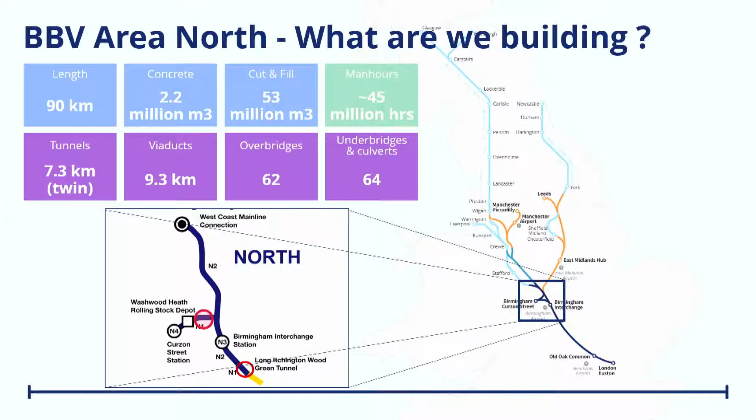Briefly, BBV was awarded the Area North of Phase 1 of HS2. It is 90 kilometres of the 230 kilometres of this first phase of the HS2 project. As main works civil contractor, BBV has to deliver 300 assets, among which 9.3 kilometres of viaduct, 62 overbridges, and of course 7.3 kilometres of tunnel. Our project is split into 3 delivery functions: major structures, main line, and tunnels, and into 8 sublots, each one the size of a major project. The sublot itself consists of a dozen assets in 2 construction areas, which are 30 miles apart.

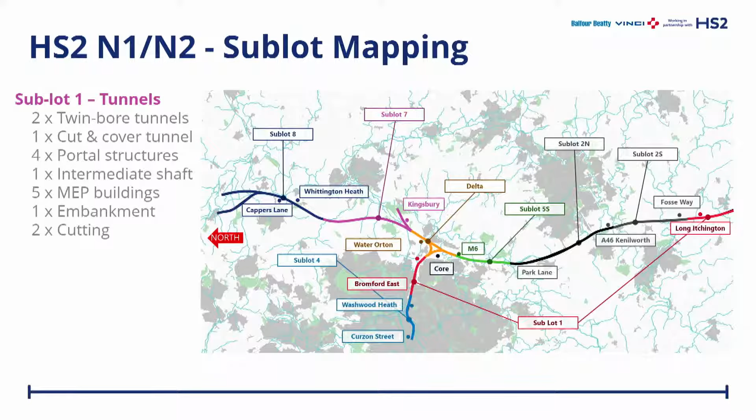So you can see here the project itself. The north is over there, Long Itchington at the south, and Bromford where we are entering the Birmingham area. Briefly, in our integrated project team Area North, we have employees from HS2, BBV and DJV. It is a co-location organization that is unified as a single team in order to deliver this railway for the future. This challenge starts and finishes with the people, of course, and we are looking at 9,000 people working at the peak, with a special focus given to local labour. As for Sublot 1, we are looking at 400 staff at the peak, with more than half already on board.

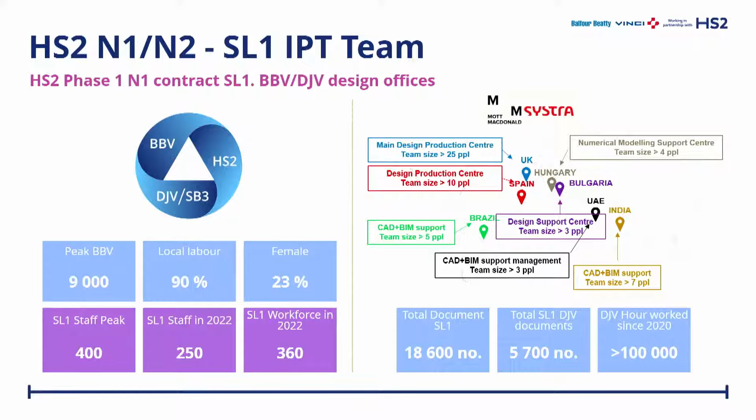Thank you, Jules. Which is which? It's the laser, okay. Right, thank you, ladies and gentlemen. As you heard, I've had some experience within the tunnel industry. It's nice to see some old faces out there, and nice to see some young faces as well.

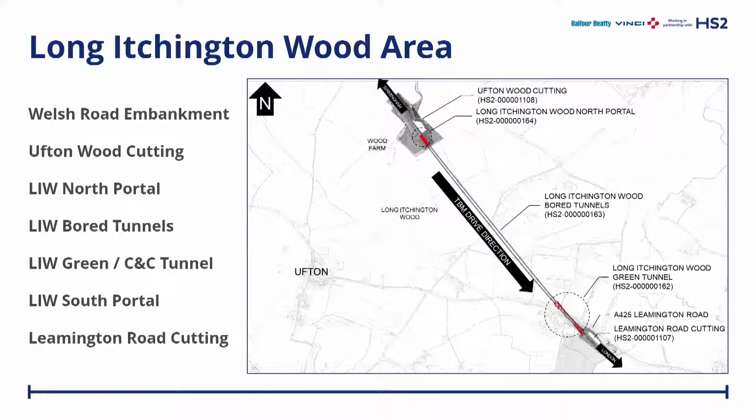This is an overview of the project, and this is the key reason why we are building this tunnel. This is Long Itchington Wood. This is an ancient woodland dating back to about 1600 AD. So obviously that's an SSSI, and the reason that we're doing these tunnels is to preserve this natural habitat.

So this is a view from the North Portal going down to the South Portal. The tunnel there, the up tunnel, no, it's the down tunnel because it's going down from London, is completed, and we're now doing Drive 2.

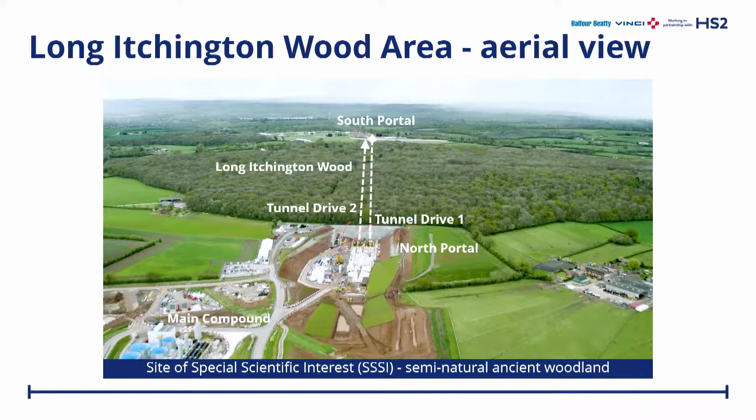Looking at the geology, mainly composed of Mercia mudstone. It's a very, very simple geology. There's been no shocks, no surprises, which is always nice. The only real surprise we've had is the Blue Anchor Formation, a little bit cloggier than we wanted.

The ground, very low permeability. So the 6 cutterhead interventions that we've done have all been in free air. We've been very lucky that way. We've had some clogging, as I say, and we'll go into that in more detail later.

Because we're going through a wood, obviously our instrumentation is fairly minimal, but as I'm going to get into later, we've put instrumentation in the woods, mainly surface levelling points, extensometers, inclinometers and piezometers, to check the progress and to check the viability of the machine we've been using.

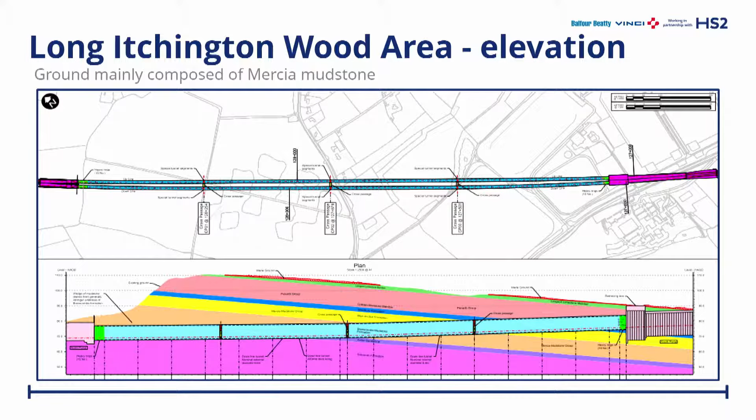So the main bore tunnel's got two 1.6 kilometre tunnels, Herrenknecht variable density machine called Dorothy. Called Dorothy after a local resident, Dorothy Hodgkin, the first UK female recipient of the Nobel Prize for Chemistry, and that was done after consultation with local stakeholders.

Tunnel diameter 8.8 metres. Segments are a steel fibre reinforced segment chosen for their durability. We have special segments for the cross passages with reinforcement and also some heavy rings at the front and end of the tunnel for supporting those areas of low cover. As I say, the TBM is a variable density machine from Herrenknecht.

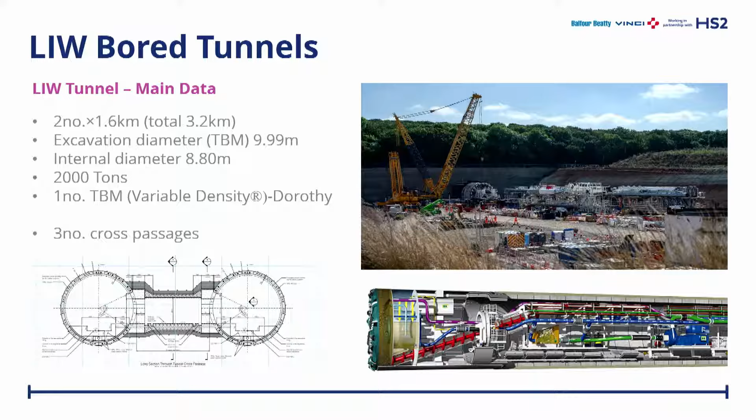And in that 1.6 kilometres of excavation, we have 3 cross passages which will be excavated by traditional means, hand excavation, sprayed shotcrete lining, and then concrete finishing.

So looking at our site installation, that's what we looked like in 2022. STP, a large STP to deal with the size of the TBM. Filter presses banging out 170 tonnes of filter cake per hour. Segment storage, 70 rings. And we've got 3 MSVs in the project along with 1 PSV for transport.

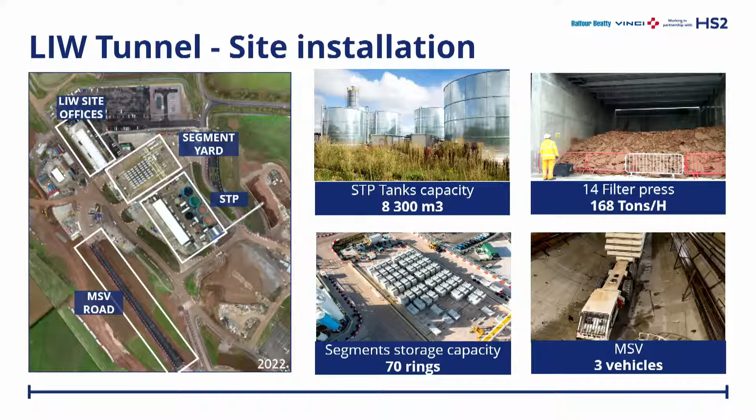STP's there, segment yard, segments are loaded onto the MSV and run down to the portal. We also have on here, which you can't see, a conveyor we installed across to a neighbouring sublot to help us with our muck away.

So TBM launch preparation, it's a fairly standard TBM launch preparation, standard reaction frame. What was interesting was when we built the machine, we built a steel ring within the tail skin, and that's our first permanent ring. So we build it in the tail skin when the tail skin is horizontal, and we flip them both up, and that gets us our first ring built.

Traditionally, on the smaller diameter machines, we build the concrete rings up along the side and then dog them in, but with this large diameter, that's not possible. So I hope this video will show that skin turning. Nope. There you are, you can just see the steel ring built inside the tail skin there.

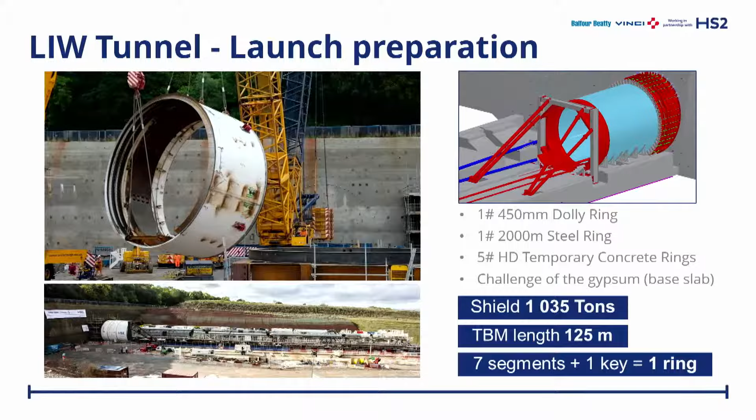So shield, 1,000 tons, backup, 1,000 tons. TBM length, 125 metres. So we built the base slab here. It's the permanent base slab for the railway. There were challenges with gypsum within the ground, so we had to deal with the swelling ground. That was all built into the base slab before the TBM launched.

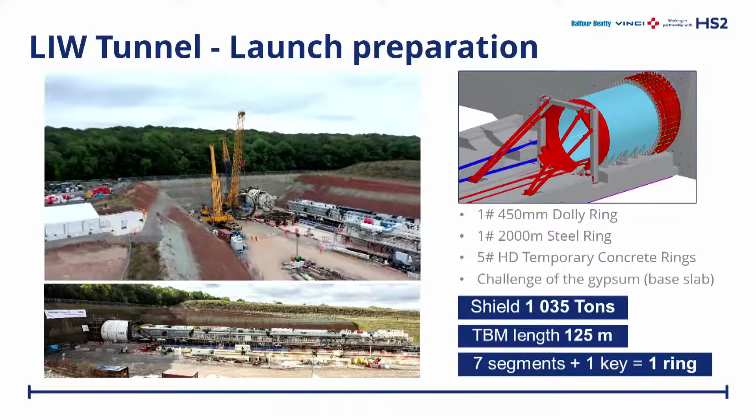So last year, we managed our breakthrough on the 22nd of July. That video's not going to work, is it?

There we go. So, key figures, 125,000 cubes excavated, 790 rings installed, and our best week was 65 rings, which works out 130 metres in the week. Did that drive in 240 days, with a bit of a slow start, but once we got past the learning curve, we had some nice performance towards the end. Best day, I think, was 13 rings in the day.

It's almost 2 million man hours worked. Got 220 labour, mainly from Tunnelcraft, and 40 staff working on the project full time.

This is Mark Thurston, who is the CEO of HS2, and next to him in the blue helmet is Mark Harper, who is the Minister of Transport. So he came through to do the first drive-through of the tunnel on HS2. So as you can imagine, that was quite a complex organisation to get him on site.

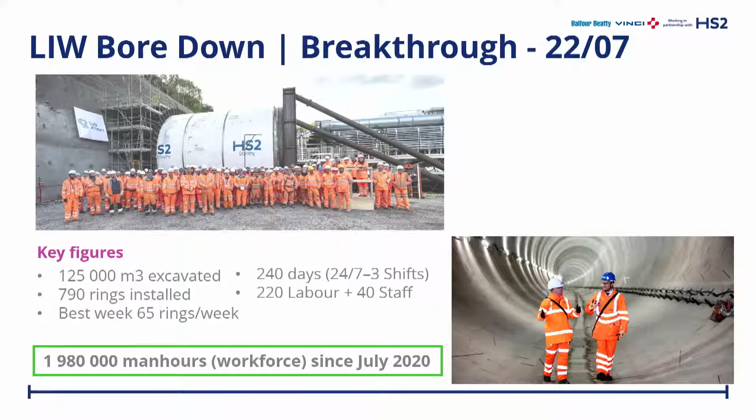So once we'd broken through, this is one of the big challenges there. In the early days, it was, do we turn the TBM round and come back the way we've come, or do we...

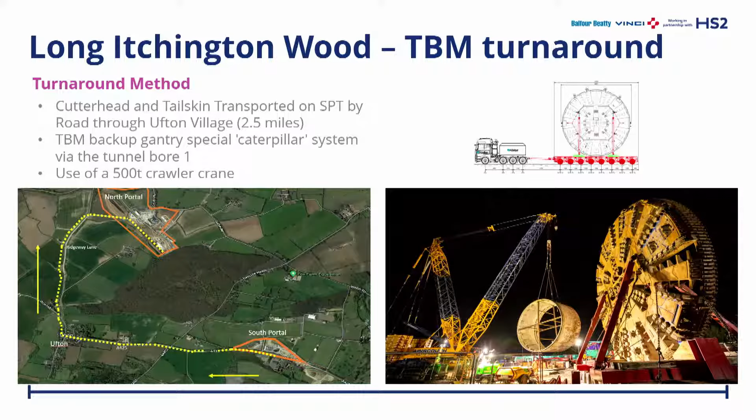Could we kill the sound? Thank you.

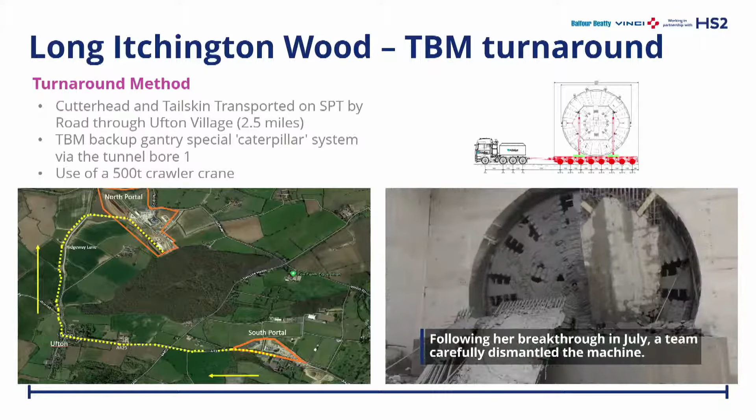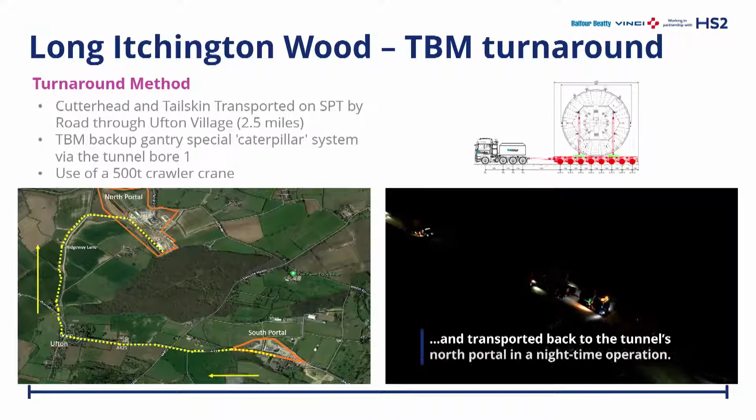Or do we disassemble the TBM and take it back to the start again? And the early decision was to take it down and dismantle it and bring it back. So the shield was dismantled in the south portal into its various constituent parts, cutterhead and the tail skin being the largest parts, main drive being the heaviest part.

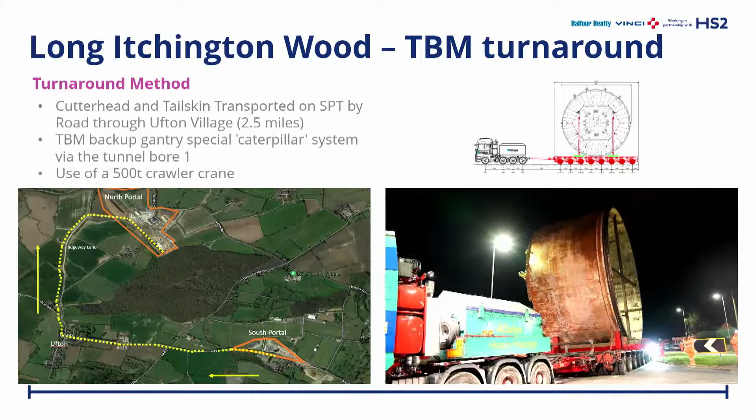And the gantries were pulled back through the tunnel using a special caterpillar system. We split the 4 gantries into 2 gantries, and we just jacked them forward like a caterpillar going out. That worked very successfully, took them out in just over 2 weeks, including the installation of all the steelwork.

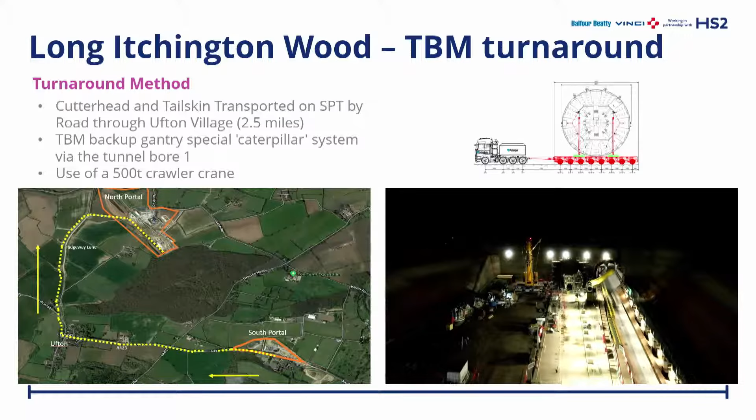Massive planning and coordination efforts with all the third parties involved. Ufton Village, we had to go through Ufton Village, which is here. We had Warwickshire County Council, HS2, local police, BT for all the services going over the road. We had tree preservation orders we had to get in place to remove trees that were in the way.

Warwickshire Power. In the end, along there, all the lines were cut out. We only had one telecom line there going to one resident, which was a problem in the end. Just before the cutterhead went past, we cut that, drove the cutterhead past and reinstated it. So as you can see, it's a rural site, so we've had issues with stakeholders and maintaining very low volumes of traffic as much as we can.

So the TBM came back, and we have to rebuild it. The TBM came back in 11 parts in total. We had a 500-ton crane there, and there you can just see the gantries coming out on the caterpillar system.

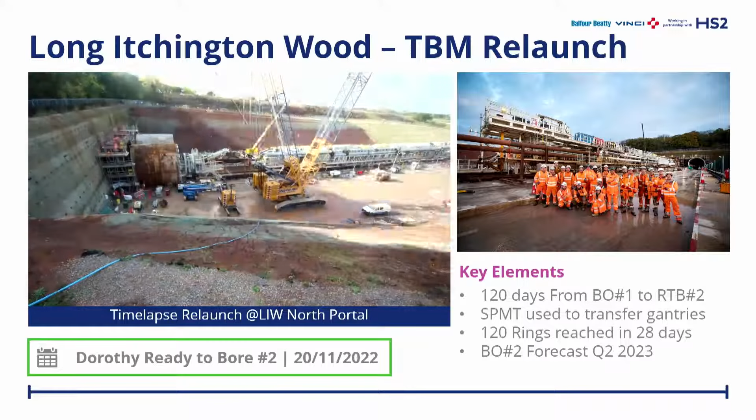So there's a lot of lessons learned from Launch 1, especially around the launch cradle design and the anti-roll device. We modified that, and we had a much more successful launch for this drive here. So once the gantries came back, they came back in drive 1. We had to translate them across to drive 2.

Original idea was to slide them across, and in the end, what we did was we used SPMTs. We pulled them all the way back up our MSV road, and then drove them back in again. And that was very successful. I was going to see if that comes up now.

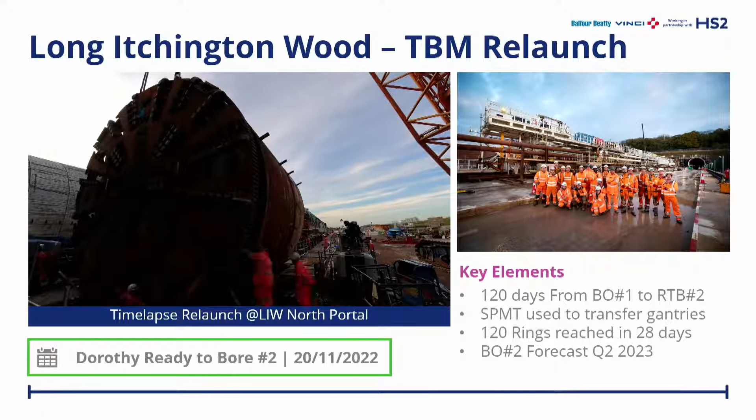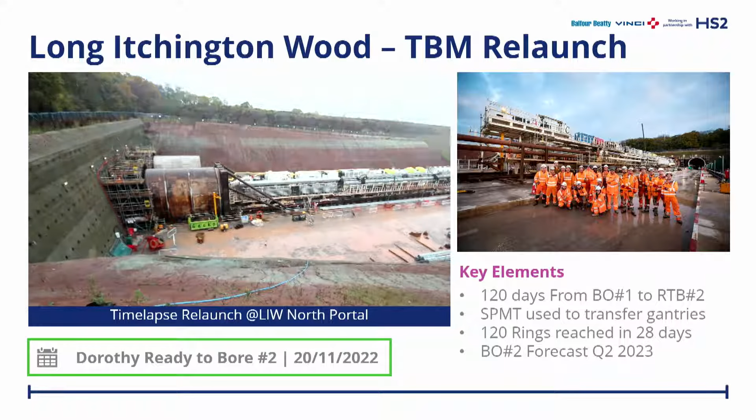So, modes of operation on the TBM. We launched in a full slurry mode because of low cover. And then once we got 100 metres into the drive, we switched to a semi-closed mode where we ran with an air bubble in the top of the chamber. This had a number of advantages. One, it reduced the total thrust pressure, and another is it massively reduced the amount of clogging we were getting from the ground.

There's 120 days from breakthrough to relaunch. We did it with 2 days to spare on our programme. This is a massive achievement for us, as a lot of people said it couldn't be done. We managed it with 2 days to spare.

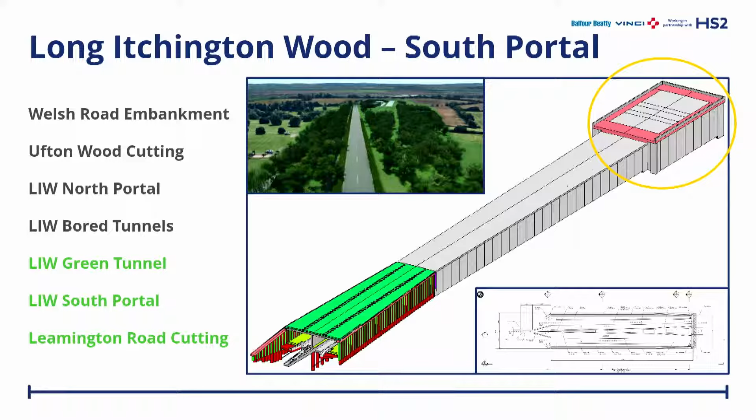So down the south portal we broke through. That's the south portal reception box there. We also have a green tunnel where the A425 will be diverted back over. And we have a porous portal here, which we'll go into in more detail.

So looking at the south portal there, the main difficulty we face is the site is split by the A425. And we also have an 11 kV running at 90 degrees across that as well. So the site has logistical problems. So the idea is we're going to move the A425. You can see the works have gone on here to allow that diversion to happen. Then we can extend the green tunnel into the porous portal here. And once the works are finished, we'll divert the A425 back.

Green tunnel and reception box, diaphragm walling, 25 metres deep. Due to the ground swelling conditions there, we use Cordek underneath the base slab. Top-down construction. One of the issues we had as well, and you'll see it better in the next slide, is that there is a polo field. We're next to the Dallas Burston Polo Club, and he had some very expensive lawyers.

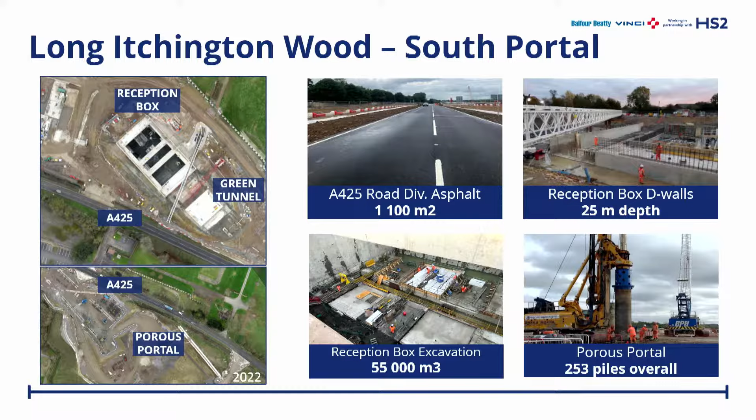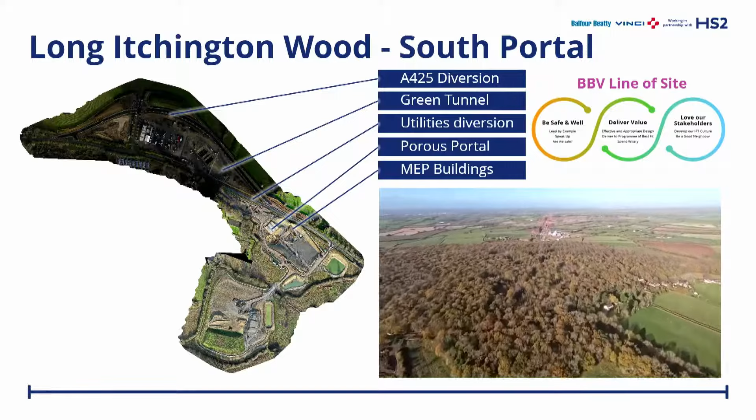So at both ends of the tunnel, we have 2 MEP buildings, which were the support buildings for the rail system contractor, and also in the future, there'll be where the operator of the network will have offices and base there. The porous portal, which we have at both ends, is a portal with openings in the roof. So as the trains are hammering in at whatever speed it is, the pressure wave is then dispersed and also reduces the noise.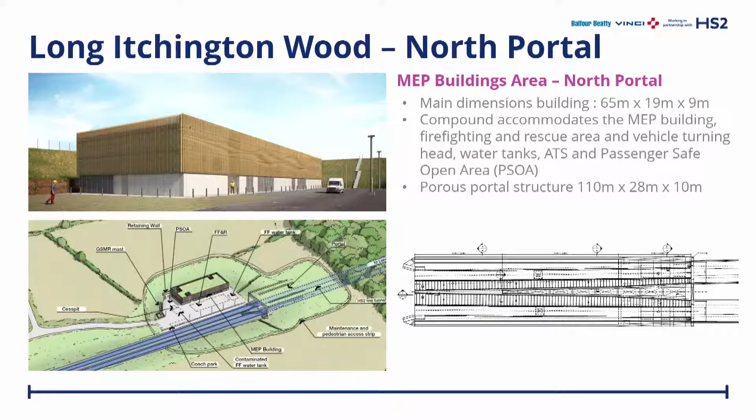And I just learned a fact before I came here that the trains, when they're running at top speed, they'll be in our tunnel for 29 seconds. So it's an awful lot of effort for 29 seconds. Okay, Jules, I'll hand you back to Bromford.

Thank you, Mark, for this amazing overview of the tunnelling journey in Warwickshire countryside. We will now focus on the second tunnel, twin tunnel of Sublot 1, which is located, as I was saying before, in the suburbs of Birmingham. So compared to Long Itchington, we're actually contemplating a tunnel 3.5 times longer, which requires the construction of an intermediate shaft that we can see here in the middle, and 13 cross passages. The diameter is actually smaller than the one of Long Itchington, with an excavation diameter of 8.6 meters, due to the line speed reduction when they enter the city or in the vicinity of the city.

The completion of the drive, which is a slight difference with the methodology that Mark just explained before, will require 2 TBMs actually, boring partially at the same time. So one is a new TBM that is arriving brand new, being assembled at the time. We'll see that later. And the other one is the now famous Dorothy that Mark is very much taking care of on Long Itchington. That is to be dismantled and reassembled at Bromford. So the particularity of Dorothy is that it was already configured to be reconfigured at the end to fit in a smaller tunnel. It's just fitted with a brand new shield, and then it can go all over again for its third drive. And we are doing the same with the STP. And you're going to see it poses some challenges in the next slide.

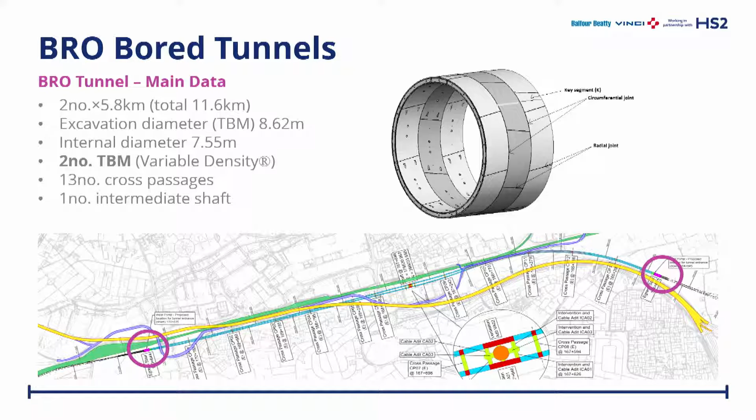So contrary to Long Itchington, the segments are slightly different. In Long Itchington, it's actually steel fiber reinforced segments. Here we're looking at reinforced segments, with only polypropylene fibers inside, but with the rebar cages due to high pressure and ground conditions, which are heavier than the ones at Long Itchington. So other design challenges we can mention are the jacking pressure and the passing of the M6, which we see over here. So the M6 is here, very close to our tunnel, and we're going to have a specific view on that challenge afterwards.

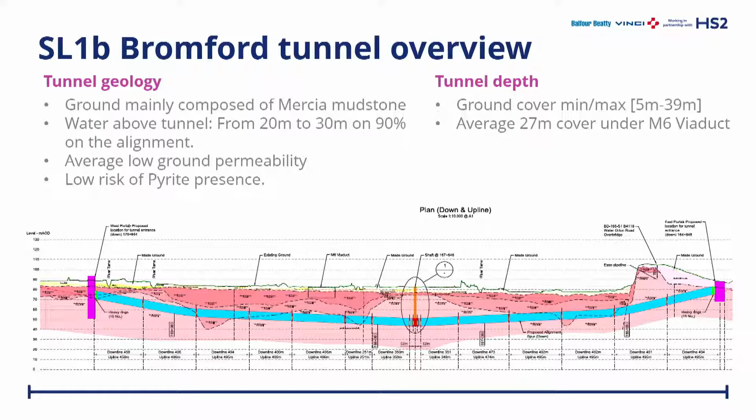So here we can see it's different from the countryside. We are inside the city. It's a very urban area. Hence the presence of multiple key interfaces along the trace, among which we have the EA with 4 crossings of the River Tame, which is close by. We have an Esso pipeline that is going around here and close to the site. We have National Highways, I was mentioning the M6 just before. And we also have National Grid with a main line powering Birmingham.

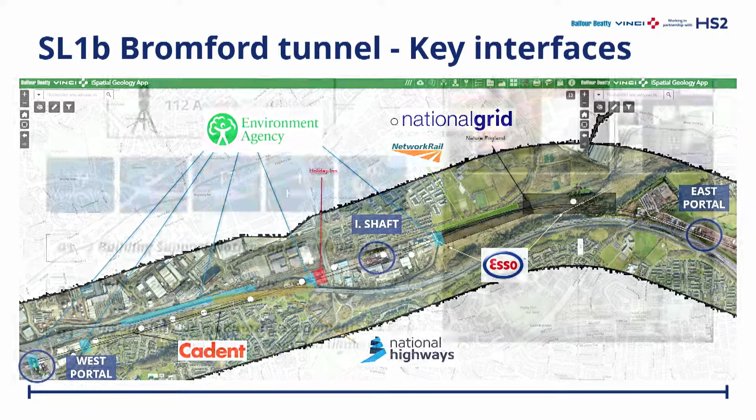We also have 112 assets in the zone of influence of the tunnel, composed of mainly 32 warehouses, 52 houses, and all the rest that is mentioned on the slide. So with HS2, we are very much in collaboration to follow the process of sending the building support notices, performing the defect survey, and installing all the monitoring equipment along the way.

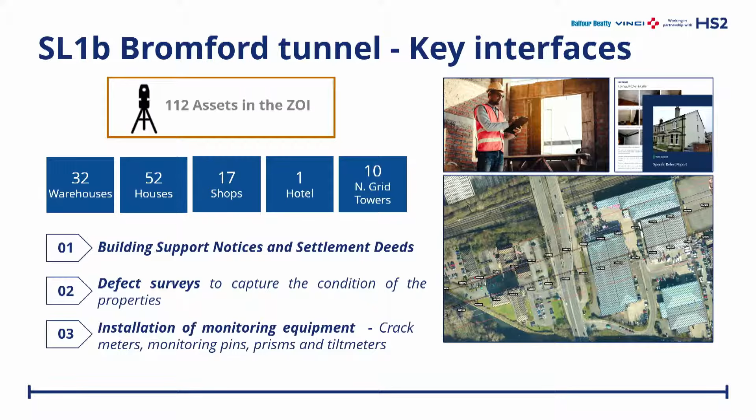As I was saying before, one of the key elements in Bromford, and one of the most challenging in terms of design, is the crossing under the M6. So as you can see, we are very close. We are in the vicinity of the M6, crossing here and going alongside for quite some time. Actually, the original design was very much parallel to the M6, so we had to reconfigure the tunnel so that we can minimize the interfaces between the two.

So the M6 viaduct, for those who don't know about this one, is one of the longest, or the longest in the UK. It's 3.5 miles long, and it's probably one of the busiest at peak hour. And it was constructed nearly 50 years ago. So, of course, the monitoring is key.

We started 4 years ago, as per National Highways requirements. We are to test 130 columns and evaluate them. Coring and testing of the pile caps is currently going on, and the potential reinforcement of those is under evaluation by the different parties. So we are currently basically evaluating what we have to do and if we have to do something.

So we will, of course, closely monitor the volume loss of the TBM as it goes close by the M6. The good results we have from Long Itchington, which are actually lower than what we anticipated in the design, give us good hope for the Bromford tunneling. We're actually at 0.13% of loss, whereas the design was taking into account 0.5% of volume loss. So we hope to have good news along the way, which would help in this case.

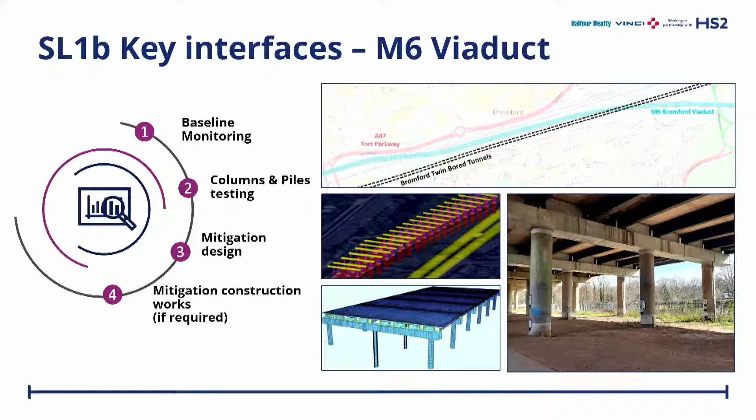Coming back to the east portal, as you can see on the screen, this is the configuration of the final structure. The building you can see on the side is the MEP building. Because of a lot of different constraints than the ones at Long Itchington, we cannot put it far to the side. So we put it on the side, but not necessarily far away. So we had to create this structure in the middle for the circulation, but it does actually take the same role. These are the aerodynamic structures, pretty much the same as the one at Long Itchington, dissipating the noise and the air pressure of the train when it's entering or exiting the tunnel.

We can also note the presence of a sump pit, so here I've put some cross sections of what we have, what it looks like internally. So this is the sump pit, so we have a pumping station, pumping out all the water and ingress.

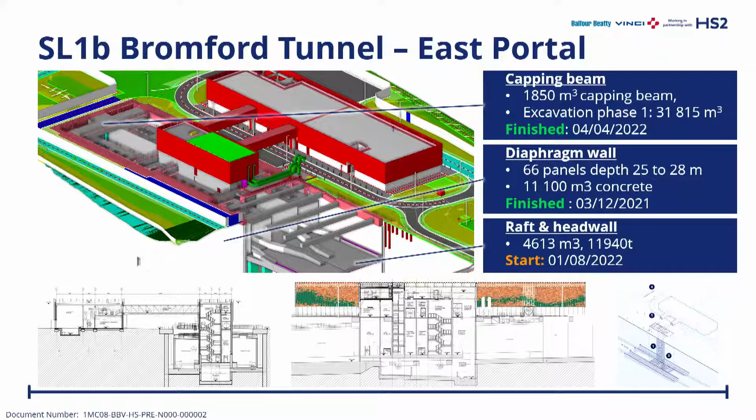Here is a view of the final configuration of the east portal. So after the portal, the tunnel is going this way, up to the west, and we have a long cut, the Water Orton cutting, which is a long way. We also have a landscaping development around, and here we see the final render of the building. We have tried, architecturally speaking, to blend this as much as possible and minimize the visual impact. So what you see is actually a tile cladding solution which has been retained, and we will potentially have a green roof.

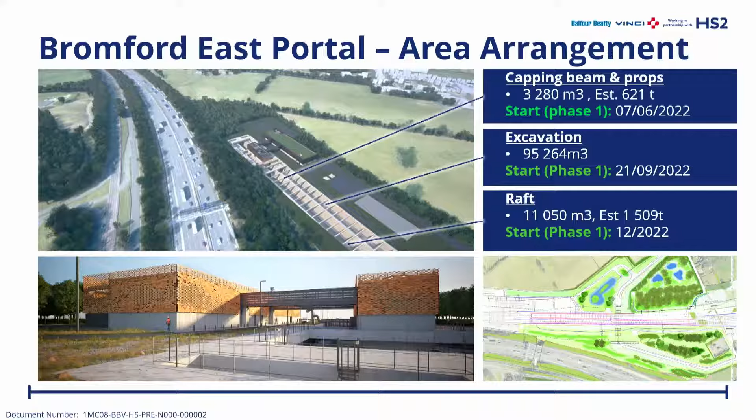Now, how do we organize to deliver that? So this is the view of the site. We have quite some challenges over there. The setup is different than where we are in the countryside, especially since it needs to support the operation of 2 TBMs and not just 1.

The STP2, as I was mentioning, will need to be reconfigured to fit here. In Long Itchington, we were blessed to have enough space to put the STP the way we wanted, but now we have to reconfigure and reshuffle everything so that we can actually fit it, like the missing tooth in this whole area. We also have the Birmingham Road cutting the site in 2. So here are the offices, here is the site, and the box is just here below.

So it's kind of a long site. We have many more houses close by, which is also, of course, presenting more noise interference with our works.

Another particularity that we can mention too is the presence of the WPD substation that still needs to be built, probably early 2024. Not in time for us to launch the TBM, so we are constructing a generator farm just next to it.

To minimize the impact of a generator farm, we're also trying to reconfigure the energy grid that is around and available in the area, being especially mindful about the harmonic compatibility of the different sources of power. So we are looking at combining a 4 MVA with a 3 MVA so that we can power up the TBM correctly and minimize the need for the generator farm. As information, the 2 TBMs will require roughly 12 to 15 MVA to operate.

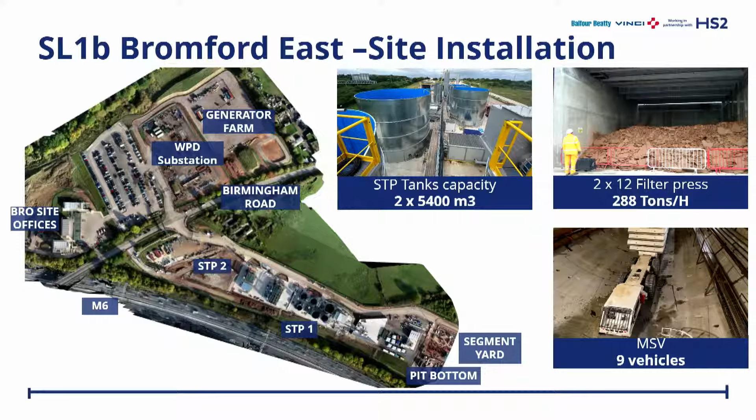So considering the configuration of the site that was just presented, the reception box is over here, so we're looking more toward the east. All the muck is difficult to move in an urban area, so as in Long Itchington, we are reusing it inside the site and avoiding having HGVs running on the local roads. In Long Itchington, we are avoiding roughly 30,000 lorry journeys by the use of a conveyor.

And in Bromford, we're going with a slightly different methodology, otherwise the conveyor would be very long to reach the destination point, so we are going with the use of ADTs. We're going to have 19 ADTs running at the peak, and this will probably avoid roughly 250,000 movements on the public highway, which I think the neighbours will be thankful for. We have to move roughly 1.8 million tons of material to areas close by, within the boundary of the site.

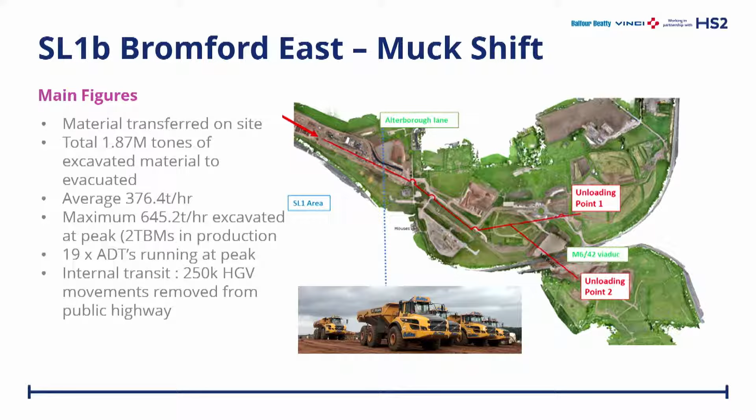The next step, of course, will be the assembly. Whereas in Long Itchington we could launch the TBMs directly in front of the tunnel with the 4 gantries one after the other, in Bromford it's not possible because there is a kind of a shaft. So we need to assemble the gantries close to the STPs, transport them with the SPMT, and then we have a whole sequence of shifting them and moving them inside the pit so that we can launch properly.

The other big challenge for 2023, apart from launching this TBM, will be the dismantlement at the Long Itchington Wood Tunnel: the dismantlement of the TBM, the transport, the reconfiguration, and the reassembly at Bromford. Everything must be wrapped up this year, so it's a pretty big challenge in front of us.

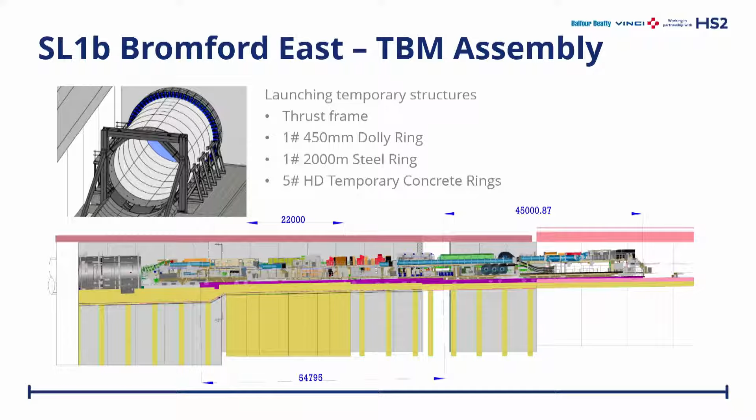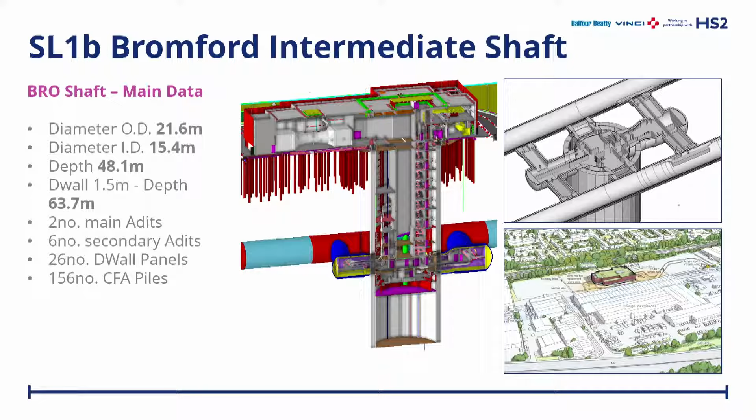The outer diameter is 21 meters. The interior one, taking into account the secondary lining, is 15 meters. We have 26 D-wall panels surrounding it, whereas the head house is supported by 156 CFA piles.

Again, same type of render as the one at the east portal. So this is the final look. So when I say we won't see a lot from the outside, this is what is inside in terms of utilities and services for the tunnel in the middle. On the top, the concrete structure, and then the architecture all around it, which is again minimizing the visual impact that we can have with this facility.

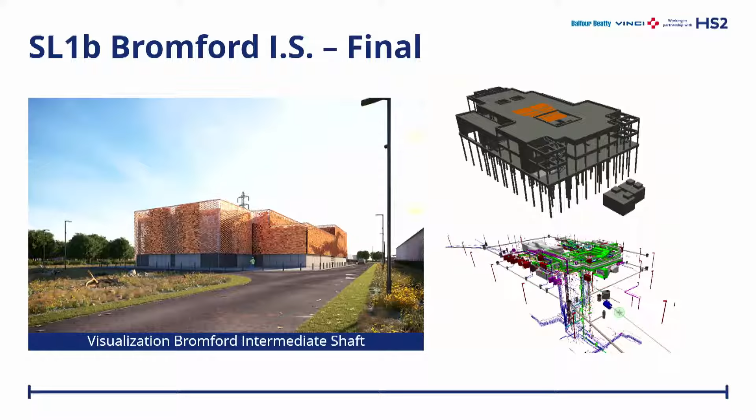So we can see the challenge in coordinating the mechanical and electrical in this kind of building and the ventilation, to fit everything which is going into this intermediate shaft. So how we organize. The site is also quite constrained. Same type of urban area, and this one is really a small area. When you go over there, you do realize that it's a very small site to operate.

The main interference and the main challenge we have in this site is the presence of the National Grid pylon. So we have this massive pylon, which is, as a fun fact, the same size as the D-wall. It's one of the main lines feeding Birmingham. So of course it has a zone of interference. We can't do the D-wall the way we want, the piles the way we want.

We need to be careful in every lifting operation. So this is kind of restraining the type of operation we can conduct. And of course, we need to take it into account at every step in terms of safety. So an assessment has been done of this pylon because if you remember, the shaft is between the two lines. So we're going to have a line pretty much here, and the other one which is close by.

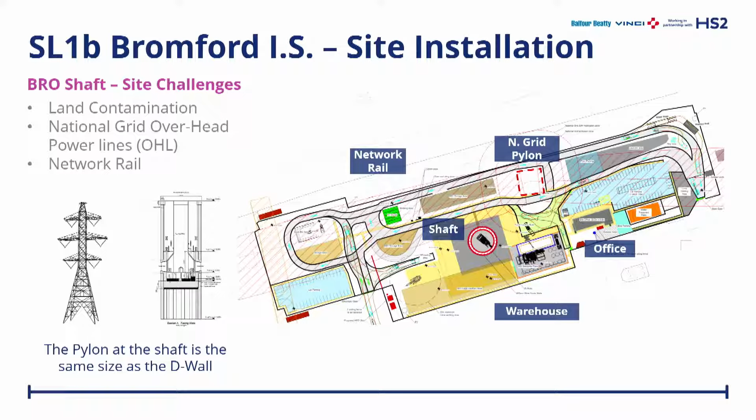When we reach the track plus one level, we have to do this system of tracks and then continue underneath with the secondary lining up to the base. The challenge in terms of timing is that the base slab must be done and cast, as well as the track plus one, before the first TBM passes. So it is one of the main constraints of our program. It's kind of a race against time to reach that level before the first TBM actually reaches the structure.

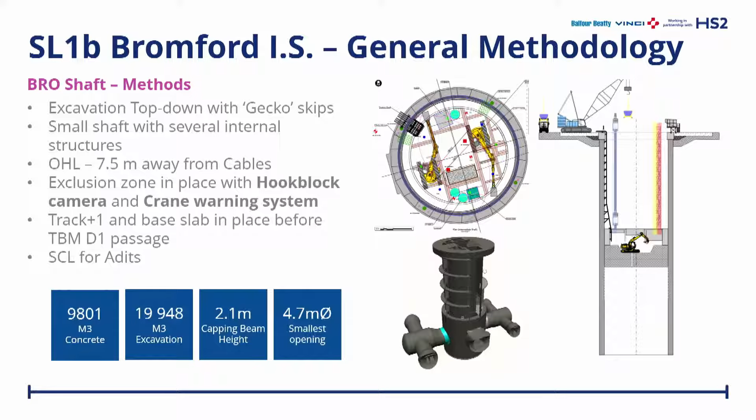The rest of the structure, once everything is done and the TBM passes, then we can start climbing up with the bottom-up structure, mainly the plenum, and then we can also go underneath to do the adits and caverns. The monitoring is quite extensive. As I was saying, we are closely monitoring the pylon, so we have installed a lot of different means of monitoring to ensure National Grid criteria are met.

News from the site: the excavation has started, actually. We completed all the D-wall by the back end of August 2022. And on the 9th of January this year, we really started the excavation process, and we are looking at starting the secondary lining soon. I didn't mention in the introduction that these are actually some warehouses. Here we see we have Network Rail. This was the shaft. And on top of it, it is a contaminated area because it's an old car auction area. So we need to take that into account in the first 4 meters of excavation, which we have passed now.

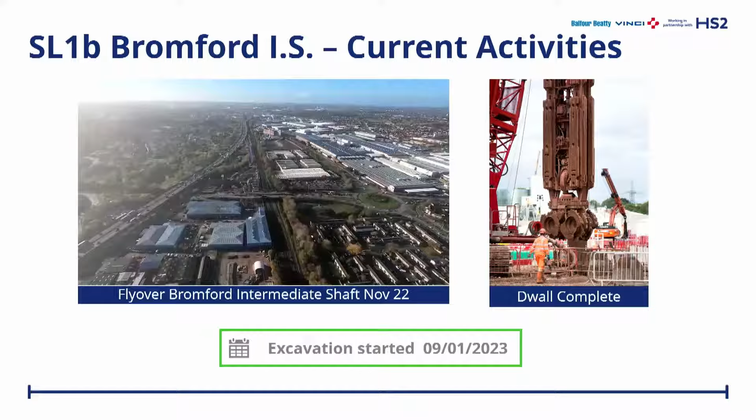Completing the overview of Bromford Tunnel, on the other side we find the west portal. Roughly the same configuration as the east portal. We can see the section on the screen with the vertical situation, the permanent props, capping beams, diaphragm walls, the base slab, the sump, which is quite bigger than the one on the east, some tension piles, and the aerodynamic structure for exiting the train and taking into account the noise, pressure and dissipation.

This is located at Washwood Heath, which is going to be one of the main maintenance depots in the area. And same type of building on the other side. So we don't have this famous operation of dismantling and transporting and the caterpillar system that Mark was talking about, because here the two TBMs are going to be dismantled fully at the west portal.

So we are looking at doing the other type of activity just after the tunnel has passed through. And we are currently executing the D-wall on the other side. So this is a pretty much accurate and existing picture of what the site looks like at the moment.

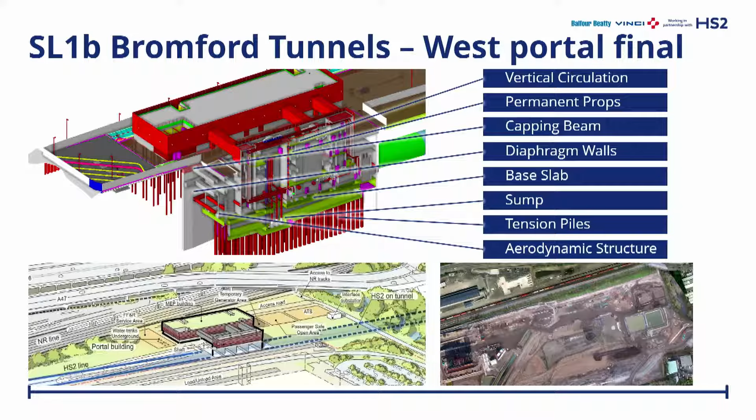So to feed all of that tunnel, we of course are relying on a precast factory. Our precast factory is located in Avonmouth, which is inside the Bristol port area. It is entirely a BBV production. We are looking at reinforced concrete segments of 2 meter width with an automated carousel system. As I was saying, the factory is directly managed by BBV.

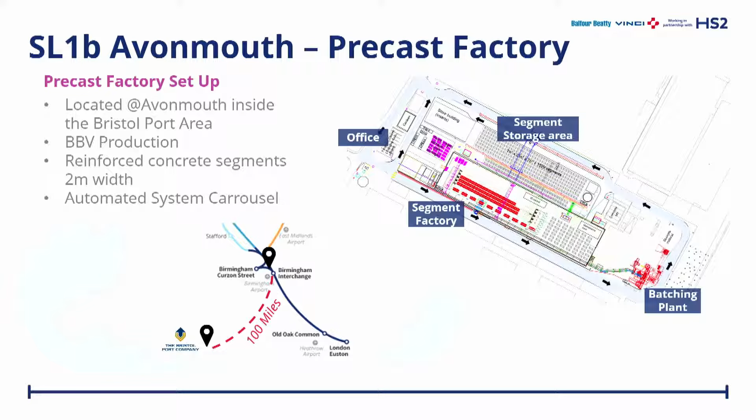It is actually the factory that was also doing the segments for HPC, Hinkley Point C, so it allowed us to take a lot of lessons learned and embed them in the way we wanted to do the processes, to optimize, and to also reach some of the sustainability goals we have by reusing the facility which was already existing. The location is, of course, quite ideal. It is close to the port, and we have easy access to the M5.

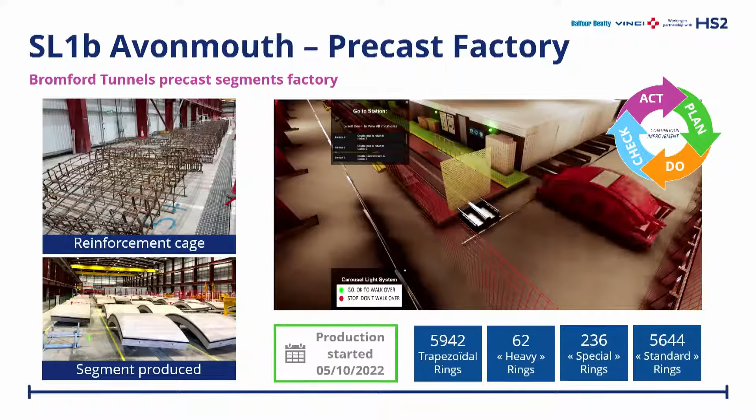So here is the process, very, very accelerated. This is how it looks in the chain. The production line has been adapted to cope with the longer segments, and the lessons learned, as I was saying, from HPC have been embedded in the current operation with numerous safety features. We've analyzed each and every one of the stations to ensure safety was prime and that all the work was correctly analyzed. Of course, we have the lean mentality in the way we are approaching this kind of work.

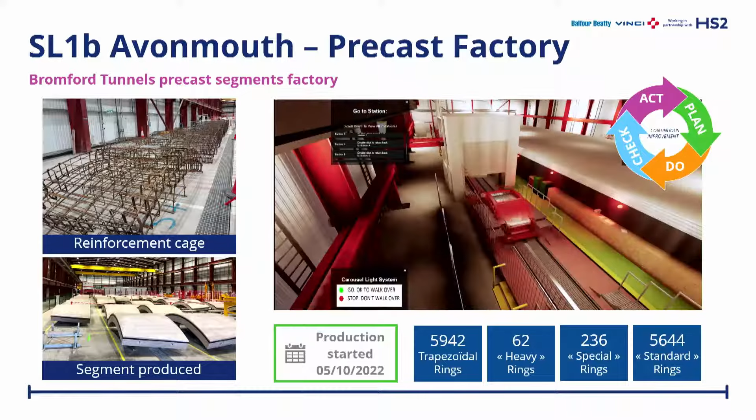So we see on the left the type of reinforcement we have and the segments which are partially stored inside to avoid thermal shock. And then, of course, they are going to be stored in the yard outside. The automated carousel line is fitted with steam curing, with 3 steam curing chambers actually, and they are disposed in the pre-storage area, as I was saying.

So we are looking at roughly 6,000 trapezoidal rings to be produced. All of them have gaskets that we have to embed prior to concreting. And the mix design contains polypropylene fibers. The production is done in 2 shifts with 15 staff and 100 labor, give or take, organized in 5-2. The real production of the segments started on the 5th of October, so a few months ago, and we have already cast more than 82 rings.

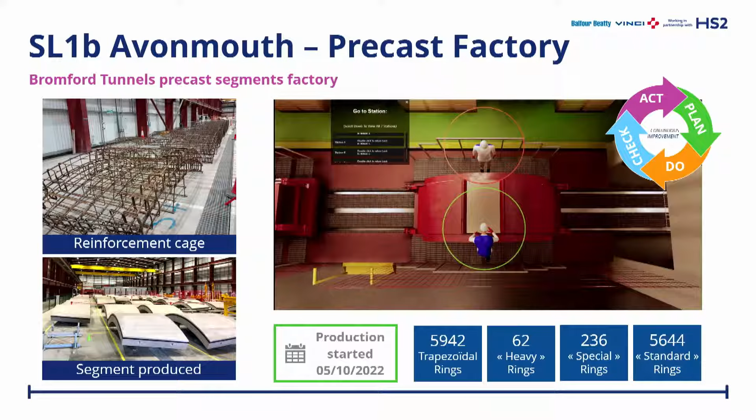So lastly, I could not finalize the overview of the Sublot 1 activity without mentioning the special care for the community as a stakeholder that we have on this project. This is actually one of our core values. The dedication of the team to share its passion for tunneling with the younger generation, residents, YouTubers, rail enthusiasts, journalists, politicians, has been really relentless. To give you an idea, we had more than 600 visitors in 87 visits hosted in 2022.

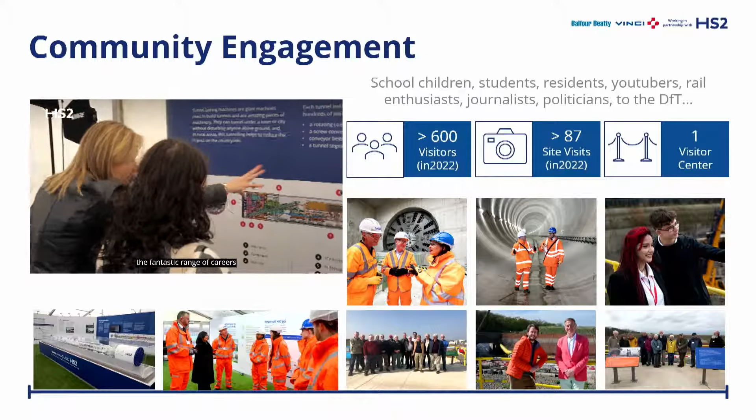In the video that you see on the screen, we hosted an open door event to reach out to the local universities. We have also launched several programs with universities to integrate apprentices. We are looking at 5% of apprentices to be embedded in our workforce and staff, summer placements, etc. And we're also working with Tunnel Skills on a tunneling apprenticeship program that is being developed, to implement it on our site.

So I really hope you have enjoyed this presentation, and I would like to praise the work of the entire Sublot 1 team, which is visible, I guess, through those slides, in order to build this fantastic infrastructure for the future. So thank you for your attention. Thank you.

Have we any questions for either of the presenters? Where to start?

The machine has worked well in the ground conditions. We had some clogging issues very early on, which we resolved by going into semi-closed mode. The Long Itchington Wood TBM was chosen as a proof of concept for Bromford. Bromford has the crossing under the M6, so we needed to give the Department for Transport a certain degree of comfort and a nice warm fuzzy feeling that the variable density machine could handle the ground with minimal ground loss, which we've demonstrated with only 0.13% face loss.